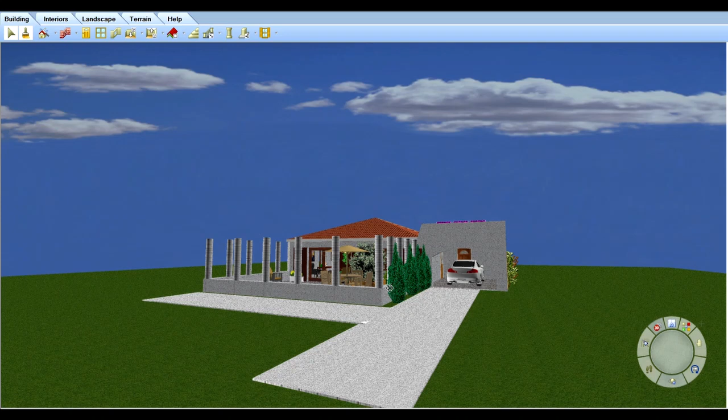Okay, this is the first of three cabins I was thinking of setting up here. This is the largest of the three cabins, so it would sit on top of a hill, virtually on a plateau. You drive up a steep driveway into the carport, and then in front of the car on the left there's an entrance. You'd walk through that entrance to get into the house. I'll give you a bit of an overview now and spin it around.

Actually, I'll give you an aerial shot first. So basically it's a box, it's square, 8 by 8, a bit over 8 by 8 meters, with an almost same size patio at the front that was surrounded by those columns that you had, and then a carport off on the side.

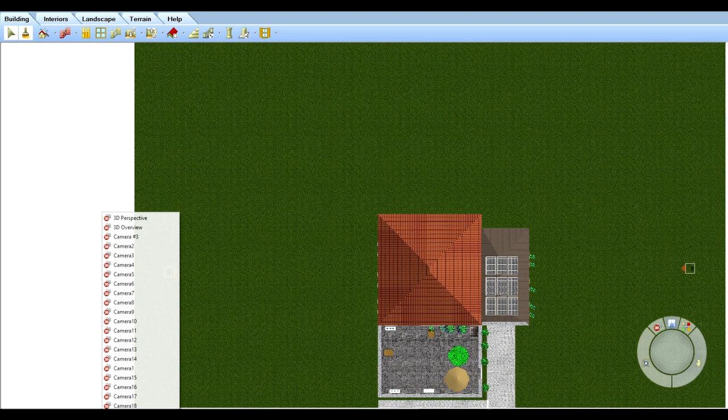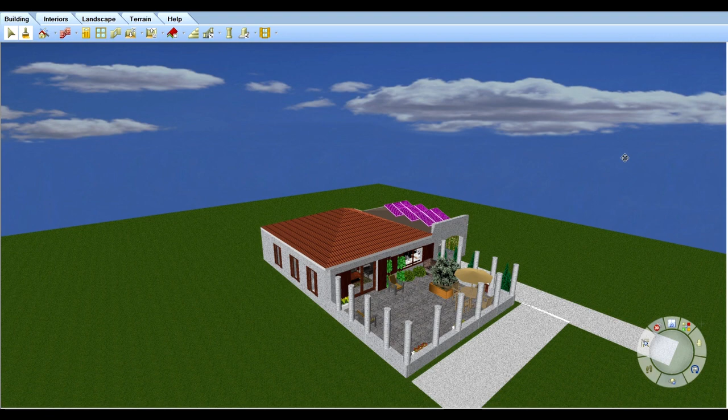So the aspect is north facing, down the valley, down the trees, the olive trees and all of that. The columns, I wasn't sure whether to arch them like I've done here, or whether that's too much, or even if the columns are too much and should be simplified. But the idea was to have the most dramatic impact that's kind of cost effective.

On the east side now, you're looking at three long, narrow windows. They've got to be fairly narrow because in the east up here it gets really hot in summer, so I wanted to minimize that - let the morning sun in, but not too much of the heat.

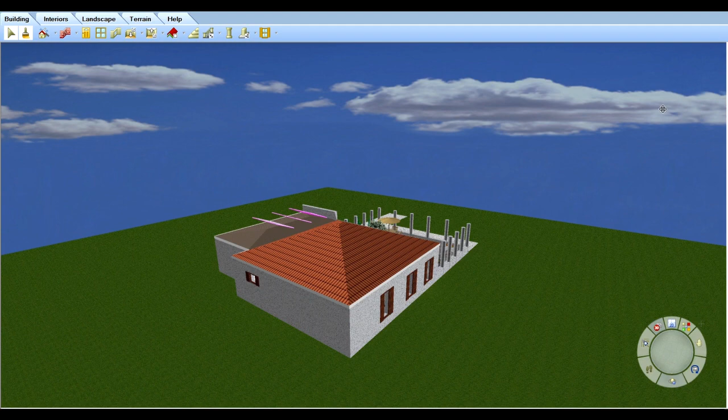And then as I turn around, all of those windows are shuttered for fire rating - you have to have shutters on them. On the south side now, which is where the worst wind comes from, there are no windows apart from a small bathroom window, plus there'd be water tanks and other utilities. And as I said, it's cut into the hill, so you wouldn't see much there.

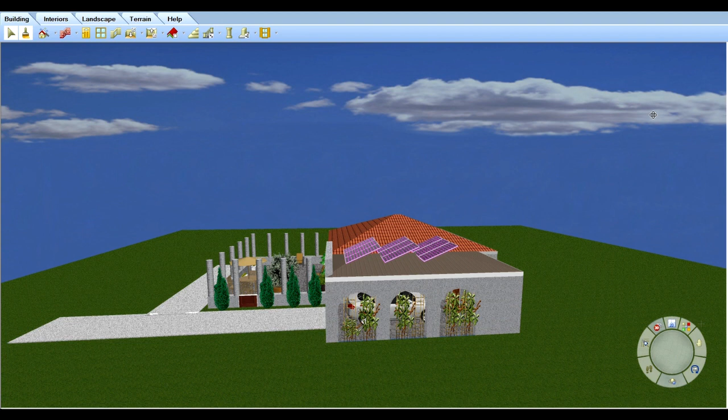As we come around to the west side, I wanted to protect the house from the westerly sun, which is the hottest sun. Hence the carport there that serves that purpose, but also to house the solar panels, which I didn't want visible because I think they're ugly. So I've raised the wall above the arch there for that specific purpose.

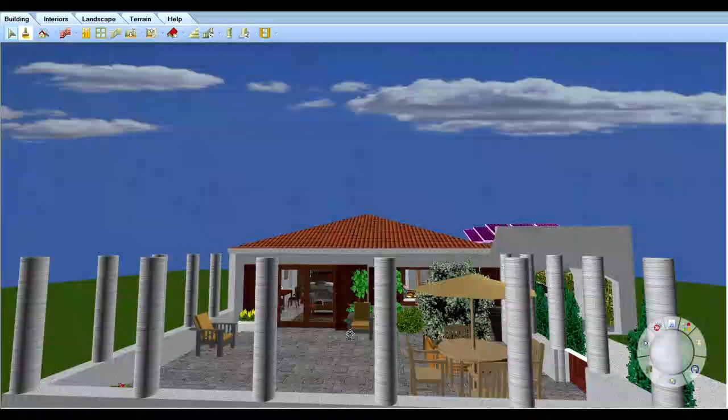Now, so that's your sort of aspect. So as I said, the main thing I'm not sure on - do those columns, they're a bit too much, obviously Romanesque - but do they clutter the view, or do they actually make enough of a point of difference for people who want to travel all this way to come up here?

Now, look at the floor plan. Basically it's 8 by 8 meters for the whole thing, roughly 8.3. Just made up, so I'll walk you through it.

We walk in here through into a mud room. Again, the idea of the mud room - because there's a lot of dust and mud here, the better the chance that we can get customers to walk through and use this, the less chance that they'll dirty the place. So it's easy to clean and maintain.

Walk into the kitchen, and to the left there's a fridge, pantry, pots and pans, a stove, gas stove, and then turning across here, you've got your sink, which looks out through these windows into the courtyard. And I've placed a heater here, which also doubles as a cooker, a wood heater.

So I wanted it between these two spaces, the kitchen and the living room, so customers can cook but also watch the fire.

As for the living room, this is a coffee table here and a rug, those two squares. Just a sofa and perhaps two or three armchairs, looking out directly through these French doors onto the courtyard again.

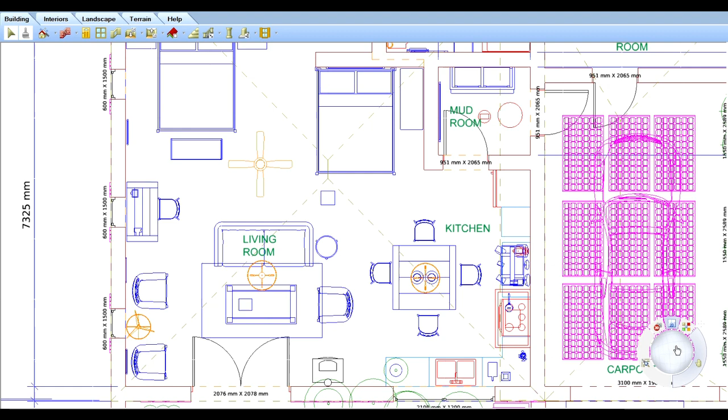I've just noticed that little pockets like that are quite cozy and comfortable. The second window is for the writing desk, because this is where the next famous War and Peace is to be penned. And the third window is for the bedroom or the bed, to give you that perspective.

Speaking of beds, you'll notice there's two beds there, and this is a bit of a quandary for me because I wanted to target predominantly couples, assuming couples would be the ones coming up for a weekend, then have the option with a second double bed for perhaps kids or two couples. The question is, is it too open? Does it need to be closed into another room? Or would two couples be comfortable sharing an open space like this? And would a family, a couple with two young kids, be prepared to do the same? I wasn't quite sure what to do with that.

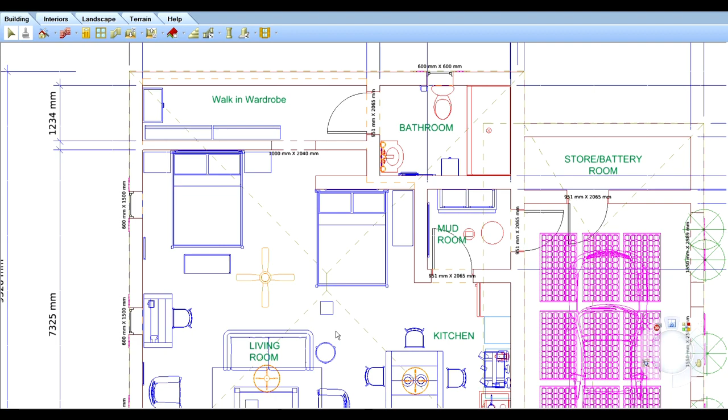If we go across here, there's a little nook for a bookshelf or something, a linen cupboard, and a walkway through into a very large walk-in wardrobe. I thought this might be a nice space because you've got baggage and luggage, and it's nice to throw that out of the way so it doesn't clutter your living area. This space also acts as a buffer for the bathroom, which I don't like opening up into the main room. There's also a battery and storeroom for the batteries to run the house, which isn't for the customer.

Just to give you an idea of what it looks like inside, from this first place where you sit and read, this is what you would see.

What I've got is a timber ceiling, perhaps exposed beams as well, not sure about that yet, concrete walls, and one of the walls I'll soften with timber. Then some form of stone on the floor that's easy to maintain and gives it that natural, rustic look. That door is the entry from the mudroom, so you walk into the kitchen at that point.

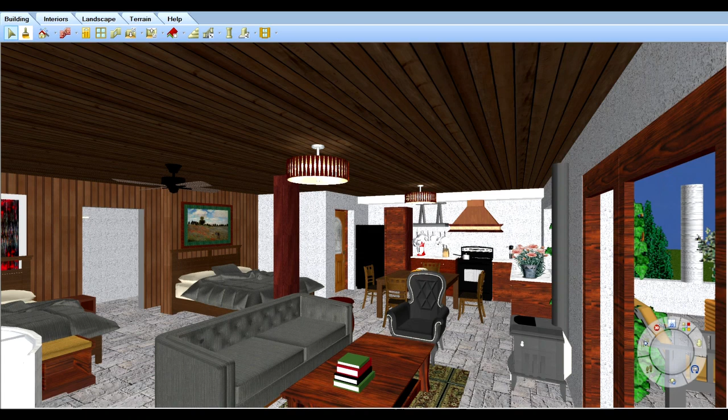If you're in bed looking out, this is kind of what you're seeing—looking through those two French doors onto the patio and out into the view, and you can also see the kitchen. The idea was to make it not too conventional, cozy without being cluttered. So that's one of the questions: do you think it's cozy enough, or is it too much stuff in there?

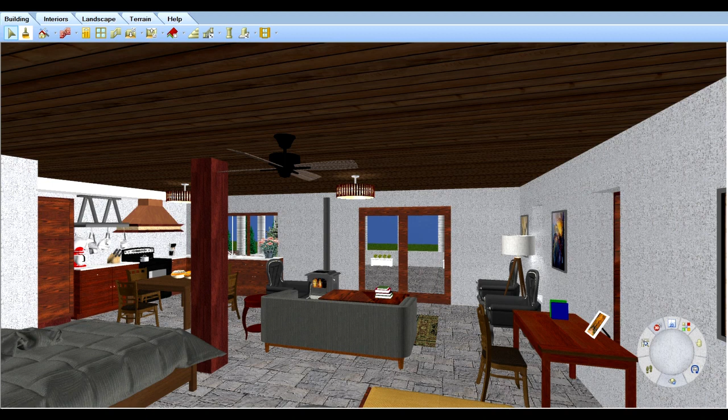Again, the view walking in from the kitchen looking out is a pretty simple setup, and again the idea is for it to be quite cozy. As I said, you can cook on that little wood heater—simple lights, a couple of ceiling fans.

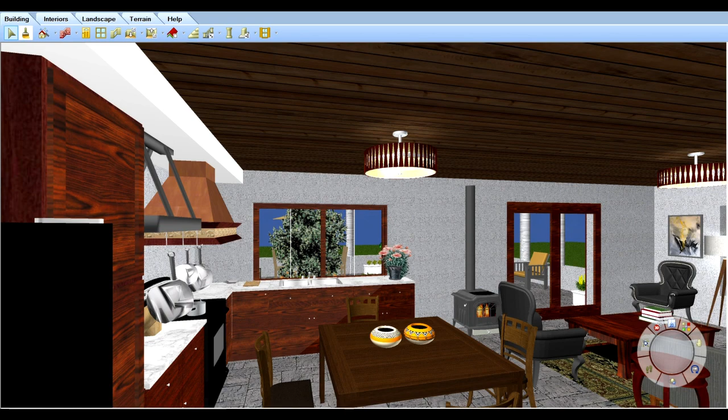As for the walk-in robe, you walk in—I wasn't sure whether to put another door here at the entrance. I kind of didn't want to because it's cluttered, so perhaps a curtain might be a better option. I don't want doors, it's just a hassle, no real advantage, although it would maintain heat better. Anyway, this storage space is simple—just hangers, a bit of shelving on top, and perhaps a cabinet too. Otherwise they'd simply put their suitcases on the ground there.

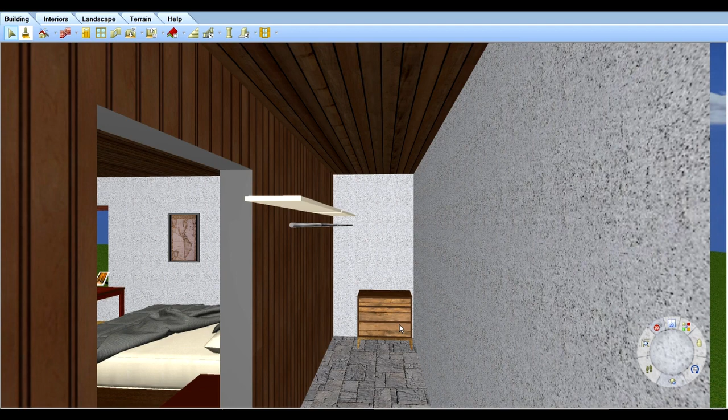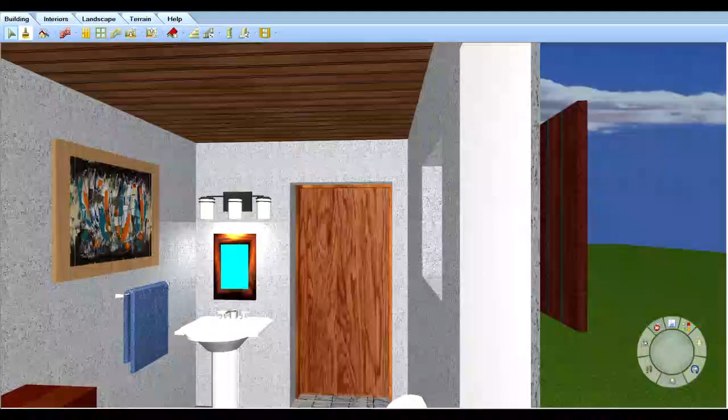If I walk backwards into the bathroom—a very simple pedestal basin because it's easy to clean, and I don't like cabinets and stuff, it's just a hassle, although I'll have a little standalone cabinet, you can just see it there. Behind me is a shower you'd just walk into. Simple, Spartan, is the order of the day.

So overall, the question is does that arrangement suit four people, or is it just impractical? Really, it's for two people.

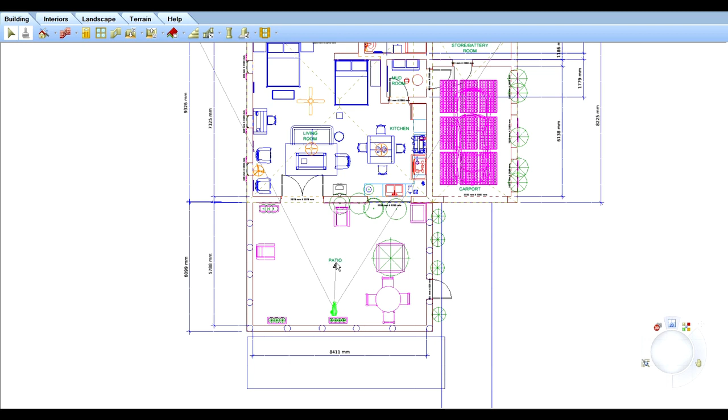I'll just show you briefly—this courtyard. The outside can actually complement the house, so the idea is these French doors, wooden shutters again because of the fire rating, across there. A bit of plants, vegetation, barbecue and stuff, all contained, pet friendly, also accessible for wheelchairs. It's quite easy, and you do get a slight view of the solar panels, but not overly obvious.

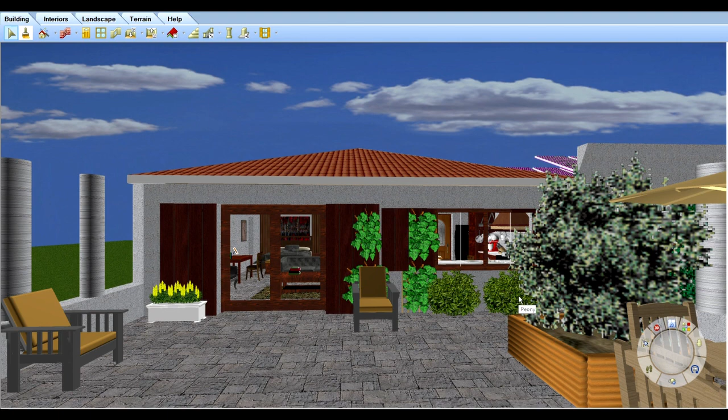Okay, that's the idea. If you've got any tips and pointers, I'd appreciate them. Thank you.